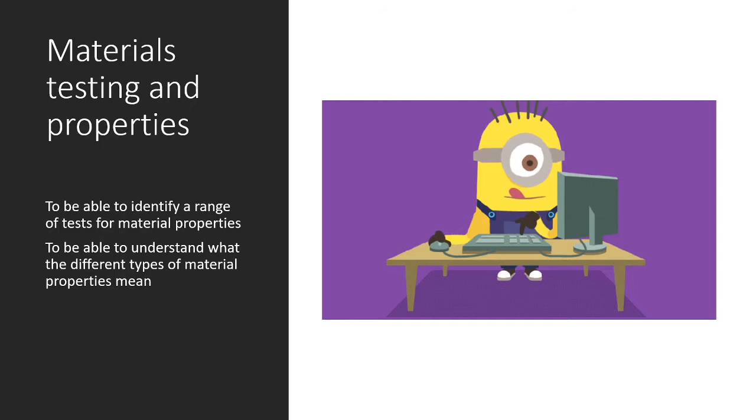Hi everyone, in today's video we're going to have a look at materials testing and properties. If you're watching these videos in the order that I would normally teach them, a lot of these things you've seen before, but it's worth having a standalone video as well just to emphasize the importance of certain aspects of it.

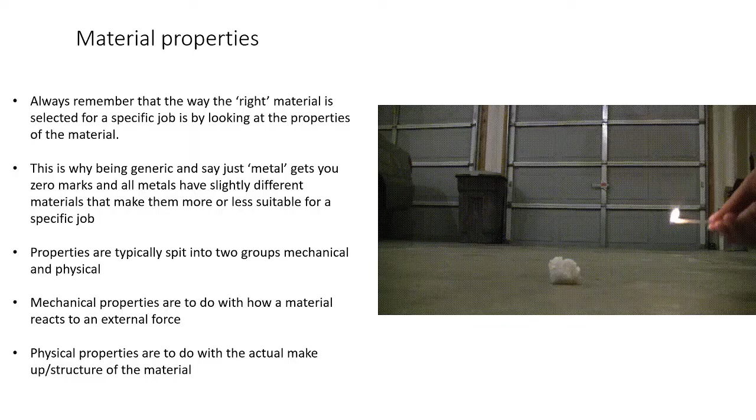What you need to understand in terms of the properties of materials are things like what corrosion means, so that might be corrosion resistance, conductivity, the difference between destructive and non-destructive tests, what the different tests are that you can do on materials to check those properties, malleability and ductility, hardness, toughness, and tensile strength. So those all essentially are to do with materials properties.

Now this bit, if you've already watched the polymers, metals and timbers videos, you've seen this already. You understand that materials properties make a very big difference. There's a reason why you can't just say it's made out of metal, it's made out of paper, it's made out of plastic, because that's a very generic term.

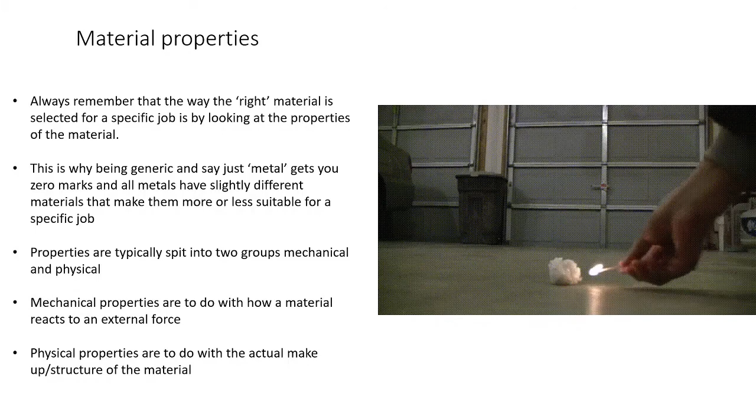I always say that's the equivalent of going to Tesco's and saying, can I buy some food, please? Because take metal for example, each metal that exists has very different properties that make it good at some things and very poor at other things.

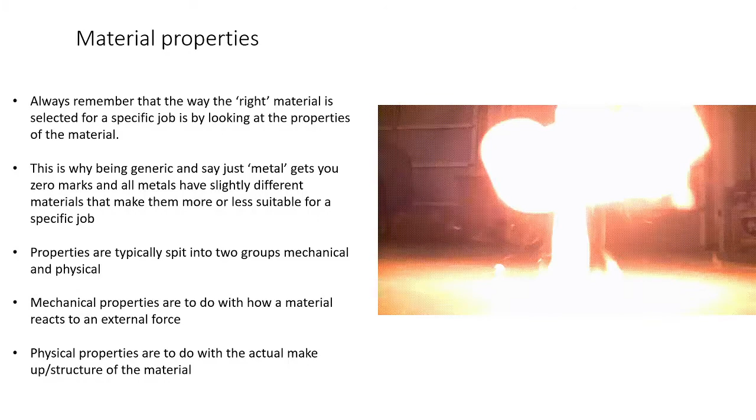It's understanding that whenever you are asked, typically the key word that you'll find in an exam question is explain why the material is suitable. Whenever you see that word suitable, what it's saying is tell me the properties of that specific material that make it good for this job.

I'll show you a couple of examples at the end of the video, but we'll take for example the question of a kitchen sink. Obviously with a kitchen sink it needs to be corrosion resistant and water resistant, because otherwise it's going to rust, or if you're going to put bleach in it to clean it, it's going to disintegrate. So you need to make sure it is corrosion resistant, otherwise it's not going to be suitable.

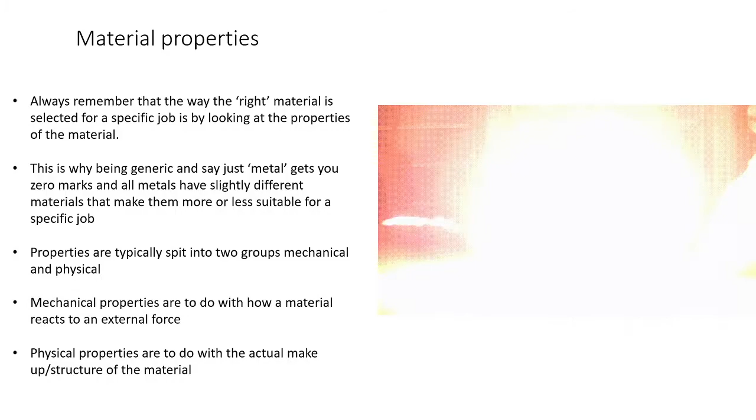With your properties, they are split into two groups: mechanical and physical. Simply put, mechanical are to do with external forces that apply to the material - I sat on it and it didn't break, or it did break, or I pulled something apart, whatever it may be. Physical properties are to do with the actual molecular structure of the material, so something passing through it, like how well it conducts electricity or heat, or light passing through it, that sort of thing.

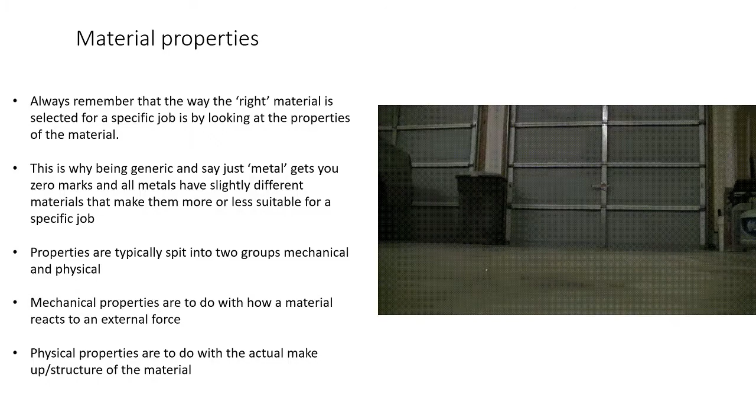So that's a general overview of materials properties and why it matters. These next two slides you have definitely seen before in previous videos, so we'll go through them again just so you understand what they're for.

Compressive strength is being able to withstand crushing or pushing forces. To put that into context of a product in a question, it might be asking why stainless steel has been used for the legs of a chair. It needs good compressive strength, because if something's got poor compressive strength, then pushing down on it - I sit on the chair and the chair breaks - useless chair.

Tensile strength is being able to withstand being pulled apart. That might be in things that are moving, for example moving parts of engines and that type of thing, something that's going to be pulled. You mostly have things like in architecture, in bridges and those sorts of things, where tensile strength, like pulling forces, are acting on something.

Bending strength is so it can actually physically bend without fraying and breaking. Shear strength is sliding past one another in a parallel plane, so what that means is essentially like shears or scissors or that type of thing. Torsional strength means it can withstand twisting.

Hardness is the ability to resist abrasive wear. Toughness is impact. Now hardness and toughness are the things that get confused the most - they are always mixed up. So hardness is abrasive wear and toughness is impact. Those two are always mixed up.

Then you've got plasticity, which is the ability to be shaped and then keep that new deformed shape. So you have your stock material, you then form it into a new thing, and then its ability to stay in that new shape.

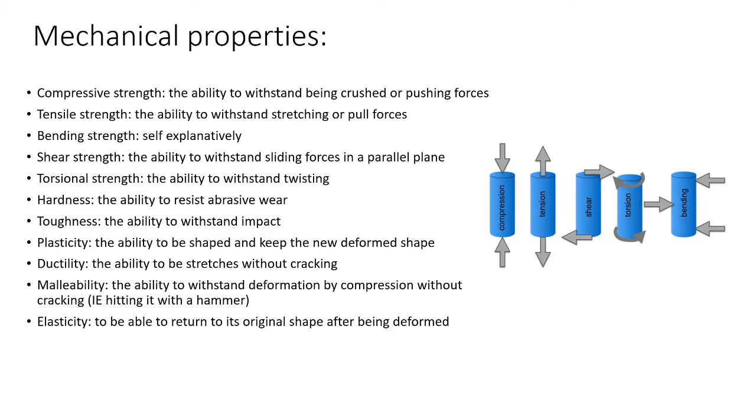Elasticity is being able to be deformed and then return back to its original shape again. So those are the mechanical properties.

Then you've got your physical properties, and these are quite simple in that they are essentially what passes through it. So electrical - does it conduct electricity or does it insulate electricity? Does it allow electricity to go through it or does it not? Same with heat - thermal conductor, thermal insulator, or then you've got thermal expansion.

Around thermal expansion, I've given you the example before - there are certain products where you have to remember that certain materials like metal will expand in heat. A perfect example of that is train tracks. There's a reason why train tracks, if you ever happen to be on one, in the cold, do not always meet up perfectly. The reason for that is it gives room for it to expand in the heat.

Originally, when they were first trialing out train tracks, they made it all one solid piece. But as it heated up in the summer, the train tracks expanded, but they had nowhere to go, so they came up and out and broke, and there were crashes. So you have to take into consideration that some materials will expand in the heat and shrink in the cold, and bear that in mind when selecting a material and then manufacturing it.

Then you've got to do with light. Opaque is light doesn't go through it at all. Translucent is that light will go through it, but it diffuses, so it breaks apart a bit and makes it blurry - that'd be like frosted glass you have in bathrooms. Transparent is that light goes through it, no problem.

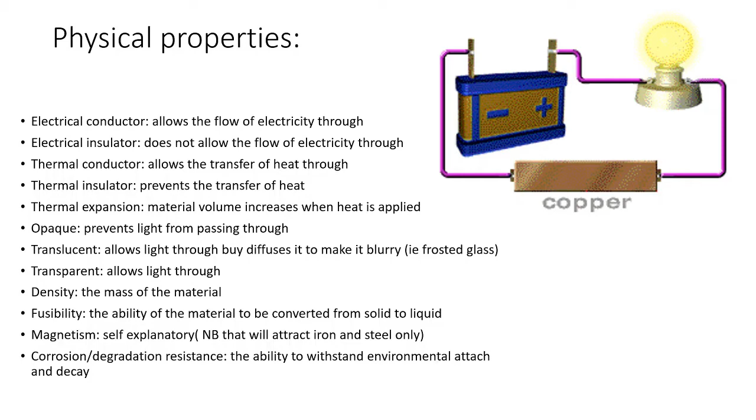So those are mechanical and physical properties. When it comes to actually testing materials, they do like to come up in questions about how do you select the right one, because there are some materials that are relatively similar, with a few small differences like cost or some slightly denser than others and so on.

So what you need to be able to do, and it does take quite a scientific approach, is make it a fair fight, basically - make it a fair test. So in order to make it fair and scientific when testing similar or dissimilar materials, you need to have a sample piece of each material, and they need to be the same shape and size.

Then when you've done that, typically you might test 3, 4, or 5 different materials. Say you're going to make a piece of garden furniture - you may get 3 or 4 different materials that you're considering making it out of.

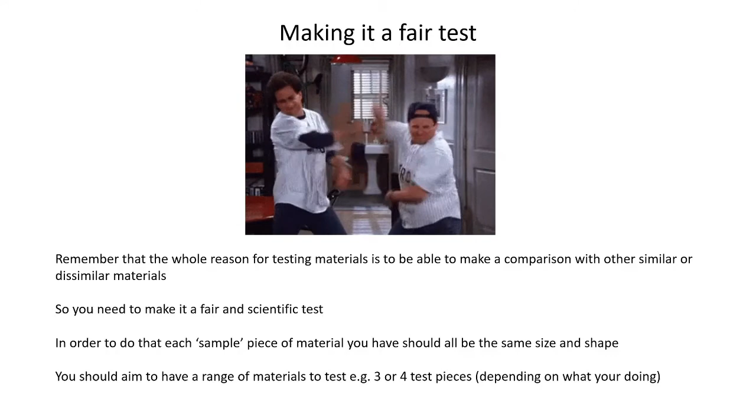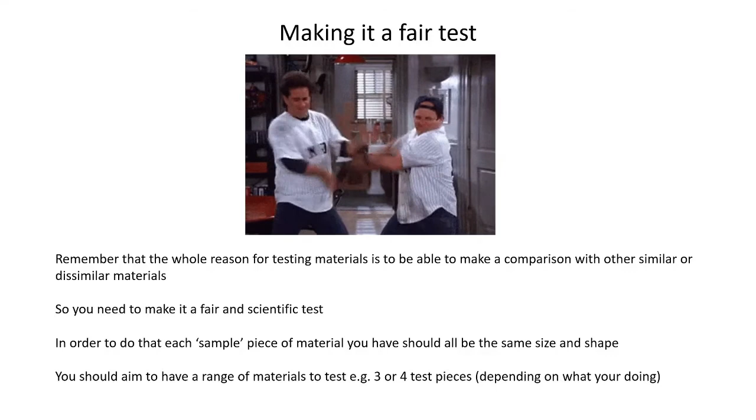You cut out a piece of each material exactly the same shape and size, and then do your tests. Now your tests have to be scientific. I'll show you what those tests are in the next few slides. What you can't do is just get a piece of material and throw it at the wall, drop it on the floor, or set it on fire, because that isn't scientific. You've not actually measured or compared anything. It's about making it a proper scientific approach to doing a fair test. If you did higher sciences or engineering, hopefully this is something you've come across before.

So, tensile strength is the ability to withstand stretching or pulling forces. The workshop test for that will simply be to have your material in a vise, have a weight attached to one end, and keep adding weight. You can measure the distance it travels before it breaks completely to see how strong it is.

Next you've got the toughness test. This is to do with sudden impact. You will have your material in the vise or a clamp of some kind, and you need to apply force to it. The best way to make this fair is to have a hammer on a pendulum, lift it up a certain amount of height, and let go so it hits the material. If it bends but doesn't break, it's tough. If it just breaks, it's quite brittle.

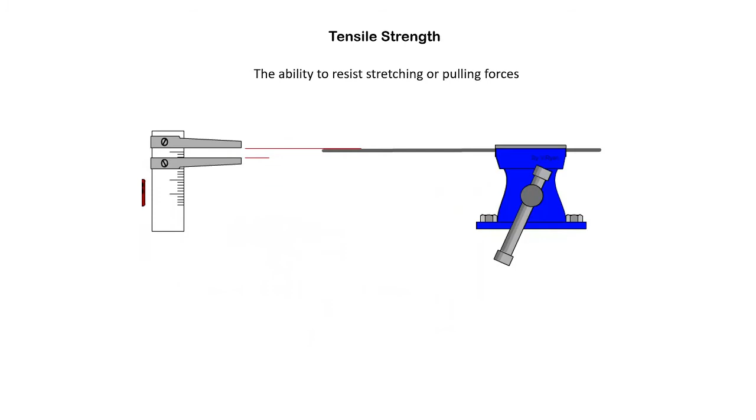Next you've got the hardness test. There are two kinds of hardness tests you can do in the workshop. These tests we're doing now are what would be called workshop tests, ones you do in a workshop in college or a secondary school. These are ones that, when it comes to your proper coursework, you can test your materials quite easily. I'll show you some industrial testing at the end as well. I just want to make sure I said these are workshop tests.

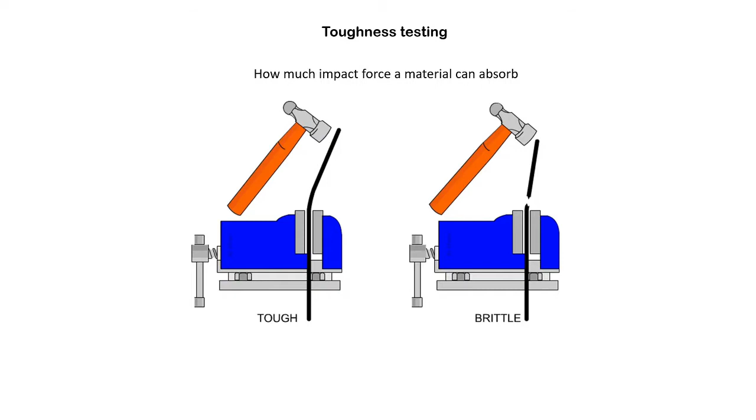So next you've got hardness testing, starting with abrasive wear. You would have your material, get abrasive paper, like glass paper, or a file, and put it across. This is basically measuring wear and tear.

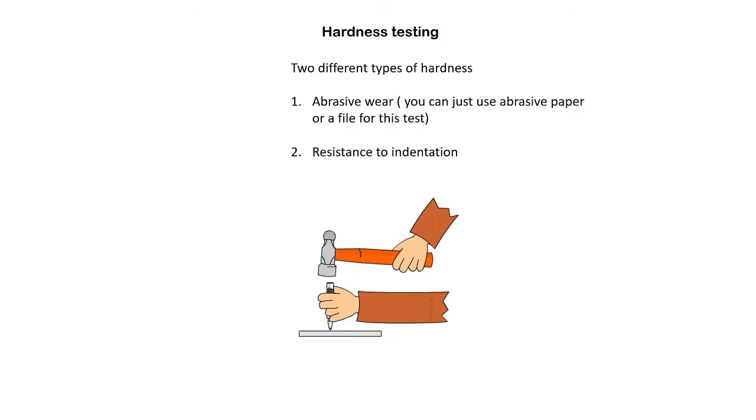Then you've got resistance to indentation. That's where you get a center punch and a hammer, hit it with a certain amount of force, and see how much of an indentation you make in the surface.

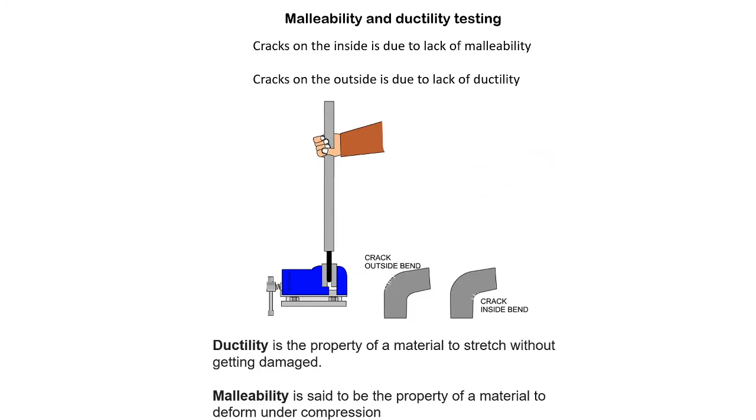So you've got malleability and ductility. This is the most common one that people get mixed up. Remember, ductility is about being able to be stretched without getting damaged, whereas malleability is the ability to deform under compression, so hitting it with a hammer. The test is the same for both: have your material in a vise, put a pipe over it, and pull it down. The reason it's the same test for both is that cracks will appear on either the inside or the outside of the bend. If cracks appear on the inside, that means it is not malleable - it cannot be deformed under compression without breaking. If cracks appear on the outside, it's due to it not being ductile, so it won't be able to be stretched. That's why there's confusion around it sometimes - if you pull it down and it cracks on the outside, it isn't very easy to stretch without getting damaged.

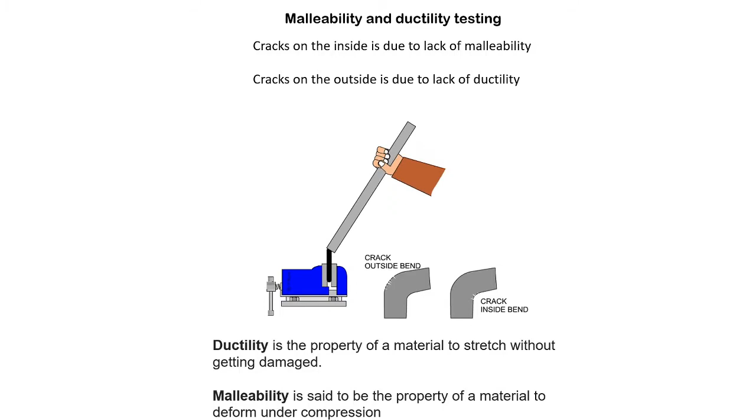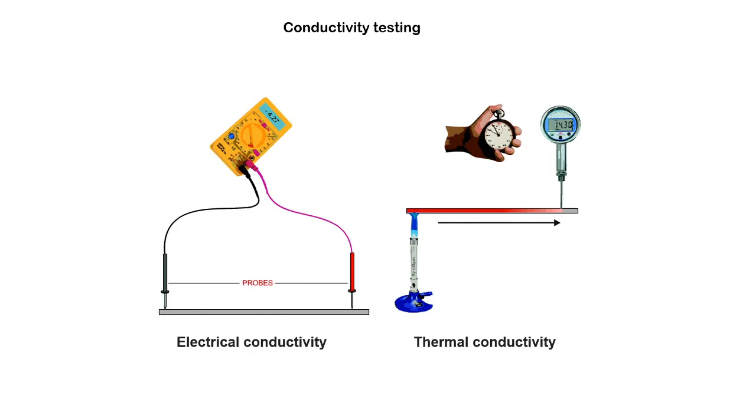Corrosion testing basically determines how fast something will corrode when exposed to environmental effects like the rain or the sun, or it could also be to do with chemicals like bleach or that sort of thing, depending on what you're trying to do.

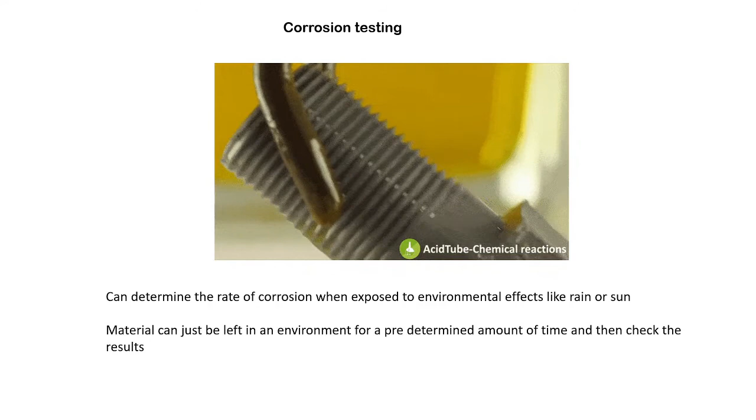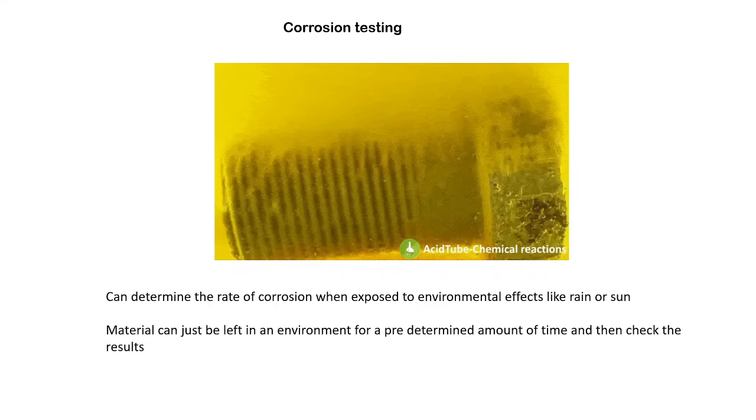Essentially, the material can just be left in the environment for a predetermined amount of time. So it could be that you take all your samples and leave them in a controlled environment outside for a day, 2 days, or in a tub of bleach or whatever it is, and as long as they're all in for the same amount of time, you just check the results.

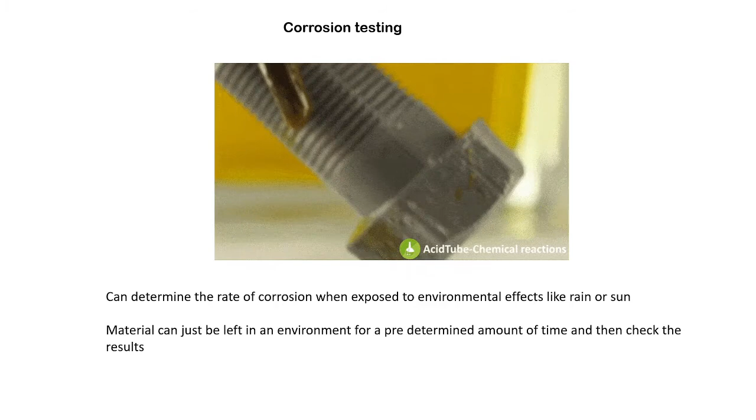So those are the workshop tests that you can do. Now we're going to have a look at the industrial tests. These are ones you're not going to have access to - they're done on a much more industrial scale, but they are very, very useful, and they do come up in exams as well.

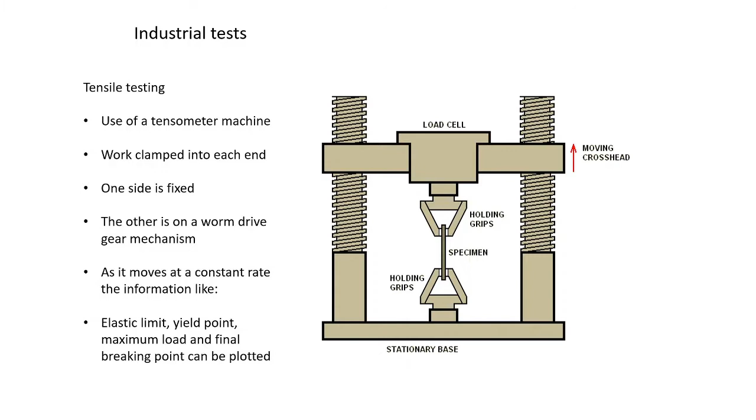Then you've got the toughness test - this is called the Izod impact test. The material is clamped into the middle, clamped vertically in the machine. The pendulum is brought up.

I mentioned before being able to do the test with a hammer on a pendulum - same sort of thing, but the difference here is you could bring the pendulum up and it would actually be locked in place. If you're doing a workshop test in college, you set up a pendulum and lift up the hammer by hand and release it by hand, whereas here you lift it up and lock it in place.

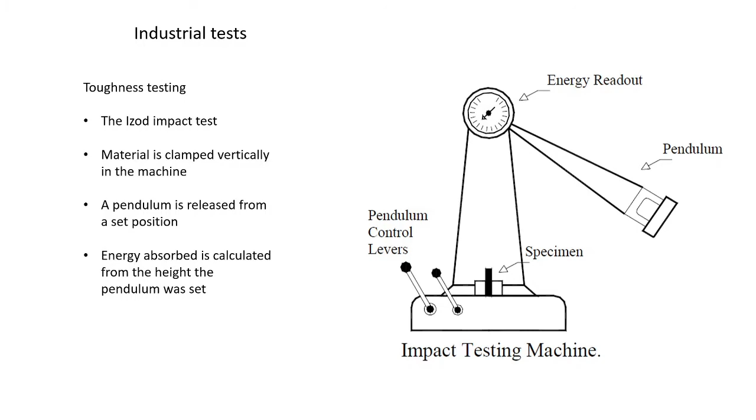There's an energy meter at the top, and you'll release it from a set position, then calculate the amount of energy it absorbed based on the height and the speed it was going at. Obviously, to make sure it's a fair test, you'd set the height the same for each of the materials.

And that will determine how hard that material is.

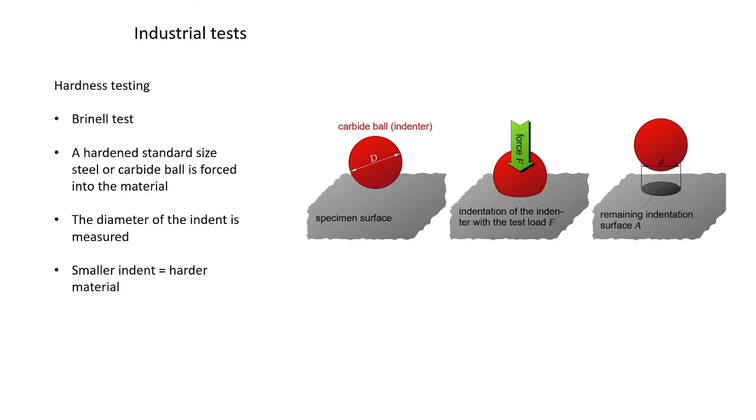Now you've got non-destructive tests. First, ultrasonic testing. This is usually used on larger items you may not be able to physically get to, like internal defects in oil pipelines, submarines, oil rigs, that type of thing. Essentially sound waves are pulsed into the material and go through it. If nothing's there, the sound waves bounce back, it comes up on a monitor, and the waves going forward are the same as going backward, and that's fine.

If there are no defects, the sound wave goes in, bounces on the end, and comes back up again, and on the monitor you'll get this sort of reading. If there are any cracks or defects, the sound wave will bounce in and come back, but it won't be as long as it should be. You'll have your measurement of what a perfect sound wave would be, but if it comes back shorter, that means there must be an error there.

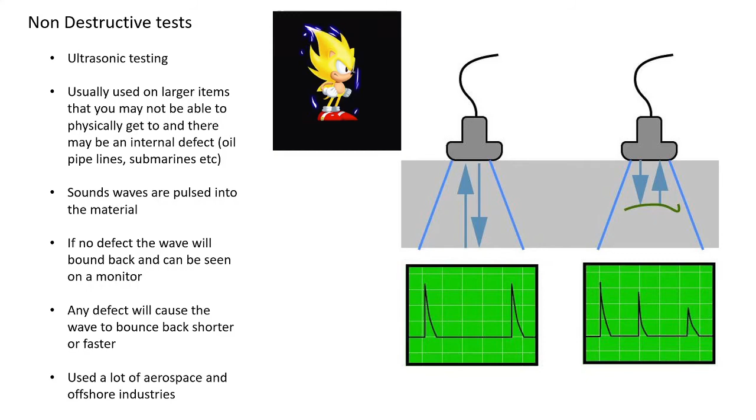It's used a lot in offshore industries, aerospace, that sort of thing. The whole reason it's called non-destructive is that, unlike these other tests where you're breaking into the surface of the material, you're not doing that with these non-destructive tests.

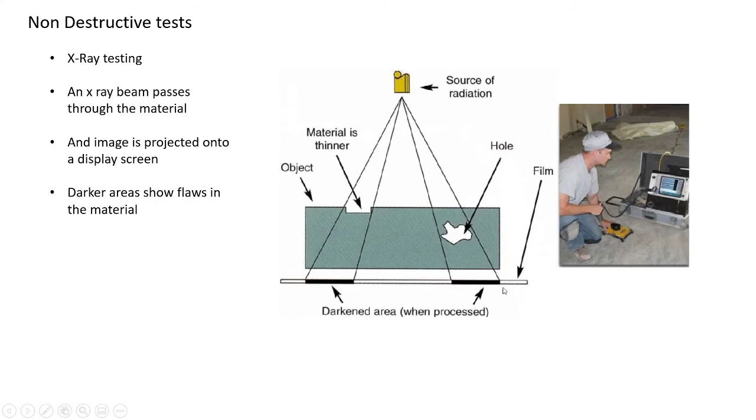Then you've got X-ray testing. It works in a pretty similar way to ultrasonic testing, except this time it's X-ray beams passing through the material, which will bring up any defects on the monitor. It passes through, and anytime there are defects, darker areas will show up where the defects are.

Looking at this content, realistically you're going to join it with two or more different topics together. So part one of a question might show you a picture of a product and ask you to name a suitable material. The next part might say, can you explain why that is suitable? For that, you have to talk about the properties of the material, and then how would you test it. So that could be a two, three, or four part question, like A, B, C, D, building up. You have to understand the testing, but also the material's properties, and maybe the manufacturing processes as well. This is why a few topics are linked together.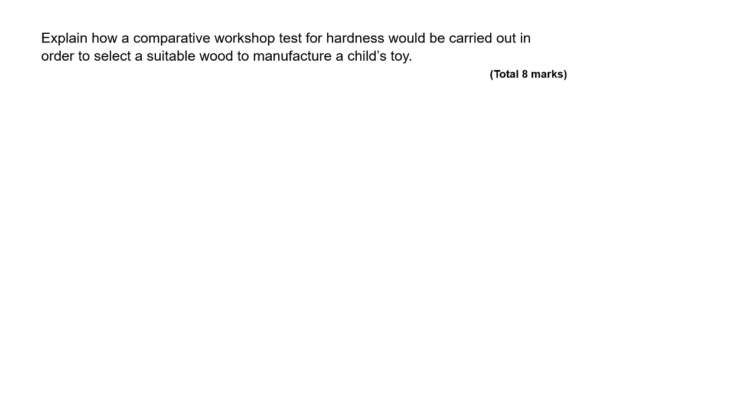So we're going to go through a few questions. First one: explain how a comparative workshop test for hardness will be carried out in order to select a suitable wood to manufacture a children's toy. That's 8 marks, so that counts as a long marked question.

Because it has not asked you to discuss anything, only explain, then you do not need a conclusion. If it asks you to discuss something, that's when you need an introduction, your main argument, and then a conclusion. Now it's only asking you to explain it. So if you look at it, 8 marks.

So really, you're looking for 4 points, and then you're looking to back up each one of those 4 points with an explanation, and that's how you get your 8 marks.

So basically, what you'll be looking for is 4 steps to doing your workshop tests. A good habit is to make sure you are highlighting the key words for the question. So if you look at this one, I've got comparative, hardness, and wood. So you're looking to set up a few tests where you're going to compare a few different types of wood.

You might, for example, have MDF, plywood, and then some natural timbers, maybe some pine, maybe some oak. So imagine you've got 3 or 4 different pieces of material because you're going to compare them, and you're going to test them all for hardness. So how are you going to make sure you can do that and do it accurately?

Make sure you understand the wording. It wants you to explain how to test a range of different woods in terms of their hardness. So we're talking about hardness here. You want to remember, what was that test for hardness?

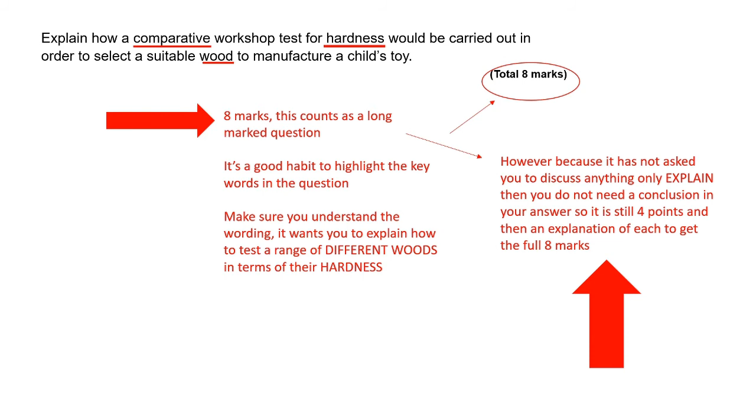Okay, so 8 marks. What you could do is have your samples of each material, each timber wood, and have the same size and thickness because that's how you make sure it's fair. For example, pine, beech, ash, you might have man-made boards, like plywood, MDF, anything like that.

You would then have the center of each material marked out because you need to make sure that you're doing it the same for each piece of material, so it's accurate. So you'd have the same thickness, the same size material, and you'd hit it in the same place, because all of that is how you make sure it's going to be a fair test.

So the hardness test, remember there were 2. First, we're going to do the dot punch test. That's where you have your center punch or dot punch, placed in the center of the material. It's then hit with force, and the force must be the same for each material, so that will be with a hammer.

What you would want to do is set up a jig so you've got a hammer on a pendulum, so you're just dropping it, because if you're holding the hammer yourself, you're never going to get it accurate the same each time. Then you'd see how much of an indent is left in the material, how much it will indent.

The next one is the abrasive wear test, which is the scratch test. That's where you would get either glass paper or a file and rub it across the surface and see how it damages it as well.

Typically, the smaller the indent, the harder the material, and then you would decide that the hardest material would be the most suitable for a children's toy.

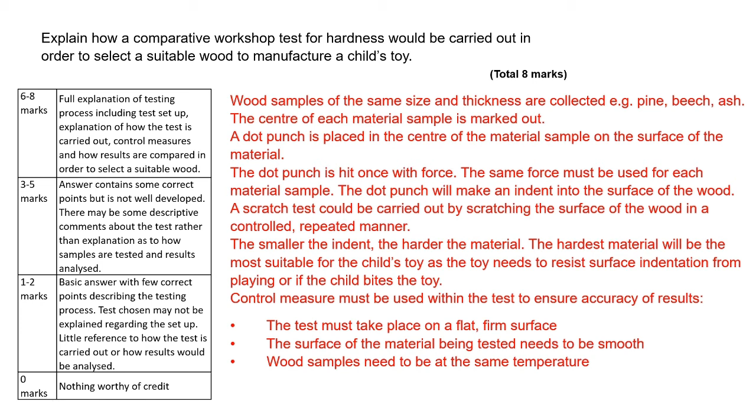And then control measures, so how do you make sure it's all going to be done accurately, and then what your findings will mean. So there's 4 points in there. Obviously, like I said, 8 marks, 4 points, and then an explanation to go with it.

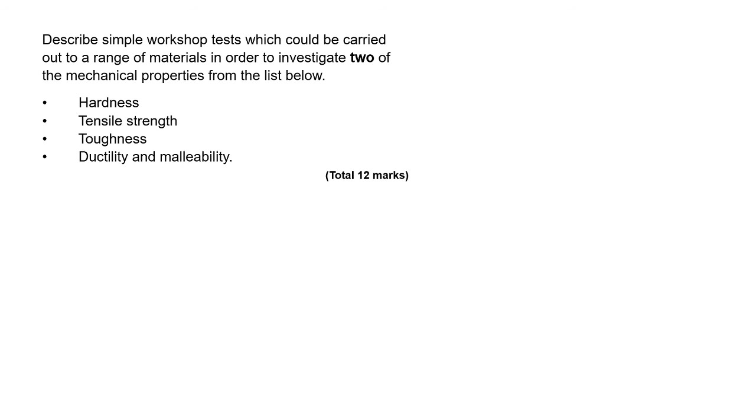Next question: describe a simple workshop test which could be carried out on a range of materials in order to investigate 2 of the mechanical properties from the list below. 12 marks is definitely a long mark question, asking you to talk about 2, so that's 6 marks of 12 marks. Talking about 2 things, automatically divide it by 2. If you're doing hardness, tensile strength, toughness, or ductility and malleability, pick any 2, it doesn't matter, then half the marks - you need to get 6 marks to talk about hardness, 6 marks to talk about tensile strength, whichever one you're picking.

Now, with those 6 marks, basically you then need to just get 3 points for each one. So that gives you 3 marks, and then explain yourself in more detail. Remember, in these big ones, because it's telling you how many, divide it by that number, and then you always want to half it because you get a mark for bringing up the point, then a mark for explaining it as well.

So you've got 12 marks, 12 minutes. Can you pause the video, give yourself 12 minutes, use the textbook, have a go answering.

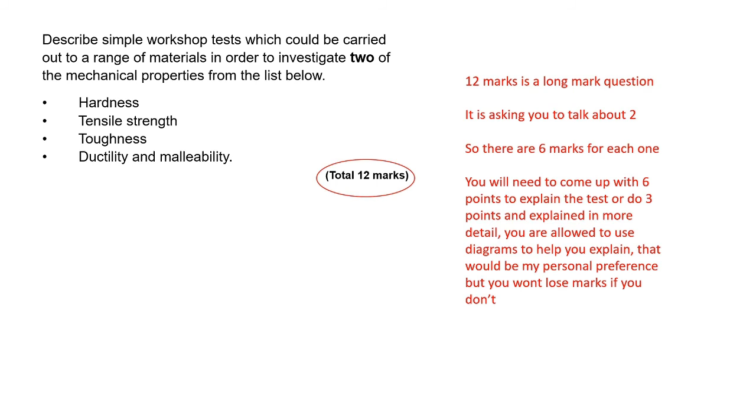Okay, so destructive testing, 2 from hardness - you can have hardness, tensile strength, toughness, ductility, malleability. So the test for hardness: softer metals are more easily filed, so that's where you would do your abrasive wear test, where you'd have like a file or glass paper. So like your indent, your dot punch - you have to make sure that you're using the same amount of force for each one.

Tensile strength will be where you have your material clamped in a vise, and then you would measure how much force it takes to bend it. So you'd apply a scale and weight and keep adding weight until it starts to bend. Toughness - you clamp your material in the vise and you would strike it with a hammer, so we talked about you have to set that up with a jig to make sure it's on a pendulum, so you're being fair and doing an equal amount of force.

Now on these you'll notice it's doing things like the Hounsfield test - these are more industrial tests than workshop tests. What we're explaining now will get you the marks, not a problem.

So for ductility: clamp your material in the vise and try to bend it at an angle and look at where the cracks appear. It also says reward labelled sketches as appropriate. The best way to get marks, in my opinion - you've got to get 6 marks for each one - if you can draw a diagram to explain it and annotate it, then do a little summary at the end of it, that's going to be the best way to get the marks.